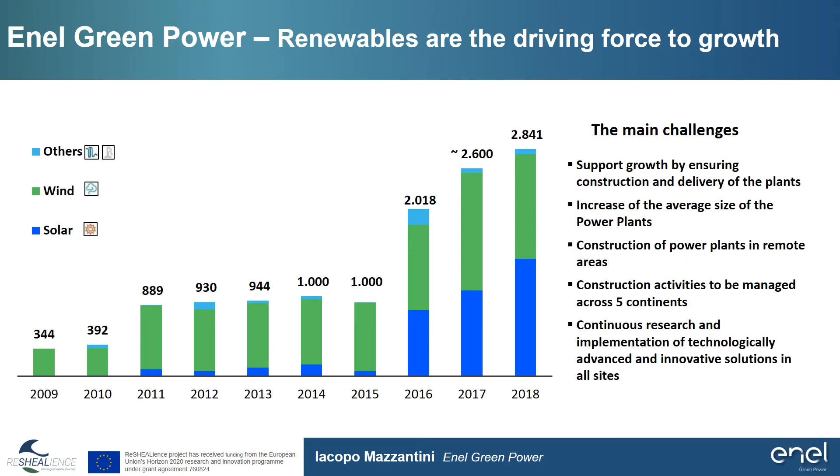The Enel Green Power strategy is based on 2 pillars. One of these is innovation and the other is sustainability. The strategy pillars are principally for shared value creation, in particular for the company, the environment, and local communities near the plants.

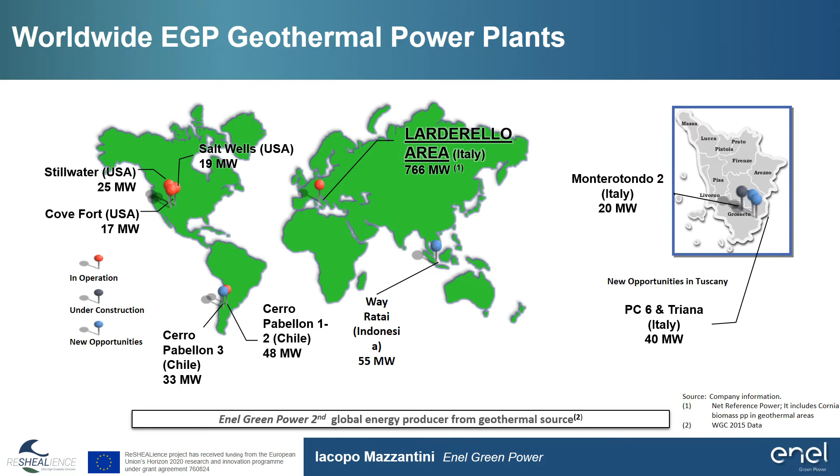We have geothermal power plants principally in Italy, in Tuscany, and other plants are in the US and in Chile. The capacity of geothermal power plants in Enel Green Power is 900 megawatts, and Enel Green Power is the second global energy producer from geothermal sources.

The assets. Here we have a few numbers related to geothermal power plants in Tuscany. They have been in operation since the last century. 37 generating units, 500 wells and 700 pipelines, more than 1,800 employees, 766 megawatts of net capacity, about 5.7 terawatt hours of annual production, and the average load factor is around 90%. 4 million tons of CO2 avoided.

The strong points are: the biggest fully integrated geothermal operator, pioneer in the use of geothermal resources. We have a culture of field cultivation, basically with reinjection as the main strategy to compensate the field decline. Performance leadership, efficiency and availability of power plants, and we are proprietary of a patented technology named AMIS. Geothermal power production in Italy covers about 1/3 of Tuscany's energy consumption.

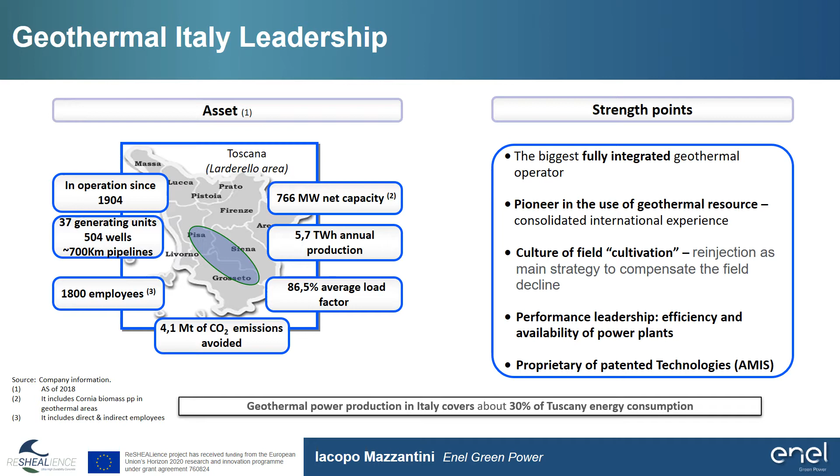Pilot objectives. Enel Green Power has built and will operate 2 pilots in Tuscany. The first pilot consists of a small-scale water tank for a cooling tower, about half size. The second pilot consists of a full-scale debris tank, a mud basin for drilling applications.

The main objectives are: demonstrate in an industrial site the behavior of ultra-high durability concrete in different configurations compared with conventional concrete. Measure corrosion in the conventional solution and compare it with ultra high durability concrete behavior. Verify experimentally the progression of cracking compared to what was estimated in the design phase. Continuous control of strain of the structure. Study the self-healing capacity of cracked elements and support communication and dissemination.

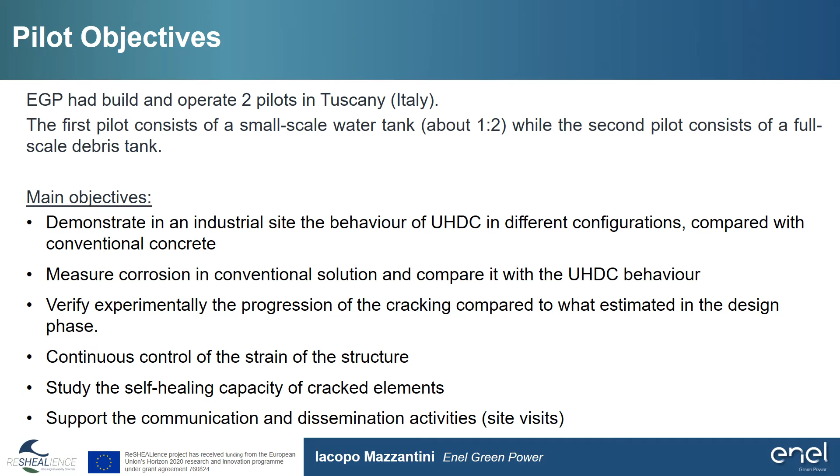The location of the pilots and the exposure conditions. The pilot is in the Chiusdino Power Plant near Siena, and the exposure condition is XA3, chemical attack in a highly aggressive environment. Pilot A, the basin for the debris tank, will be built near the drilling station and used during the execution of a new production well, reproducing the same operating conditions.

Basin B is the water tank, already built within the area of the power station in operation, and reproduces the most real operating conditions possible. The pilot tank will be connected to the real tank of the power plant in order to use the stream of geothermal water.

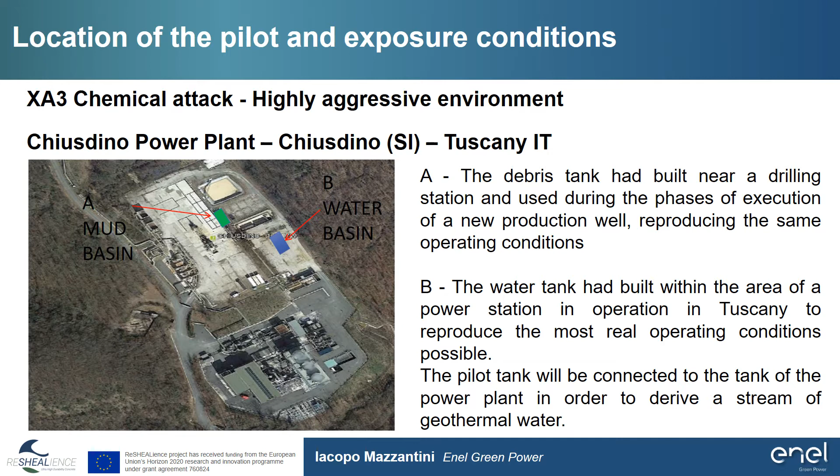Here we have the geometry, the final design of the water basin, and you can see it is divided into three small tanks. The color is related to different types of mix design, thickness, and geometry of the basin. In particular, from the left side, we start with traditional concrete, arriving on the right side with the slab in very small thickness: in one case 2 centimeters, and in the other case 3 centimeters of thickness. And the different color is the addition of nano cellulose and nano alumina.

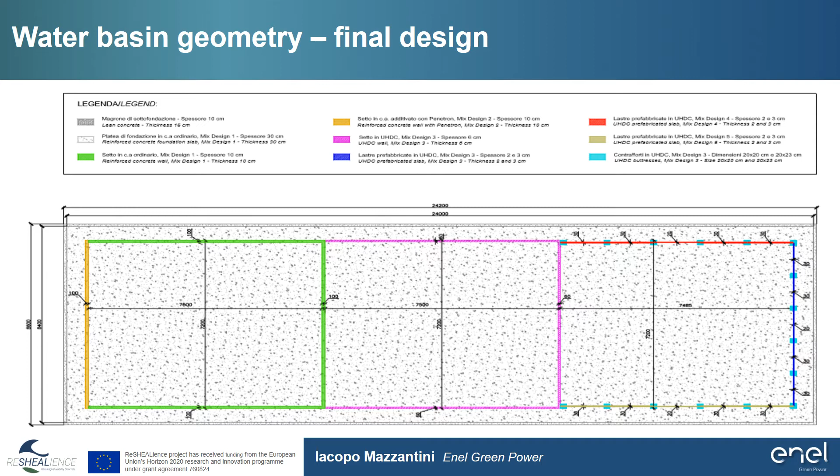Here you can see the mud basin geometry. The geometry is like the traditional mud basin, and we have used the same mix design for all walls, and we will use this basin when we start the drilling operation.

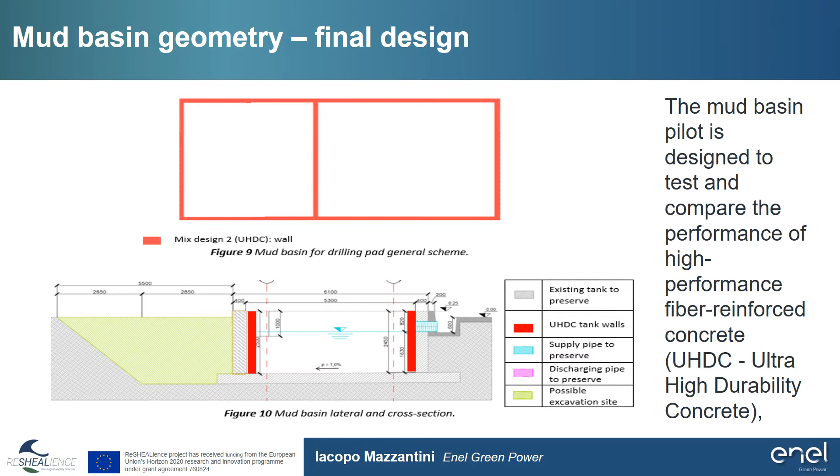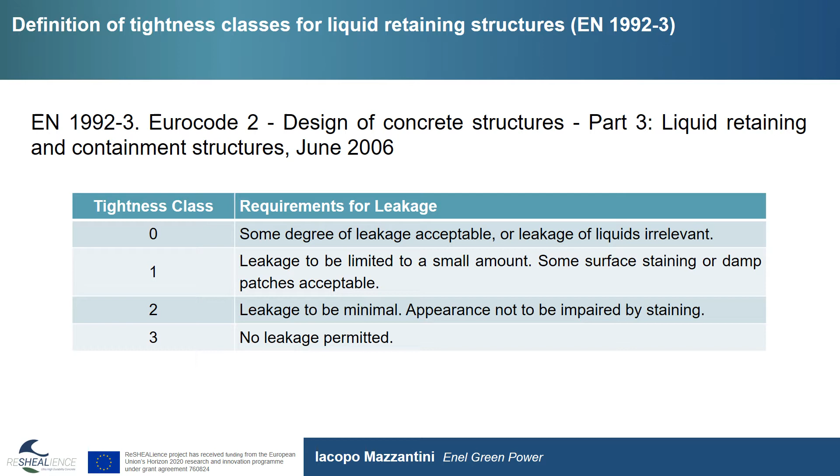In class 0, we can have leakage, and with a growing class we need to reduce the leakage, up to class 3, which requires ensuring the water is held without leakage.

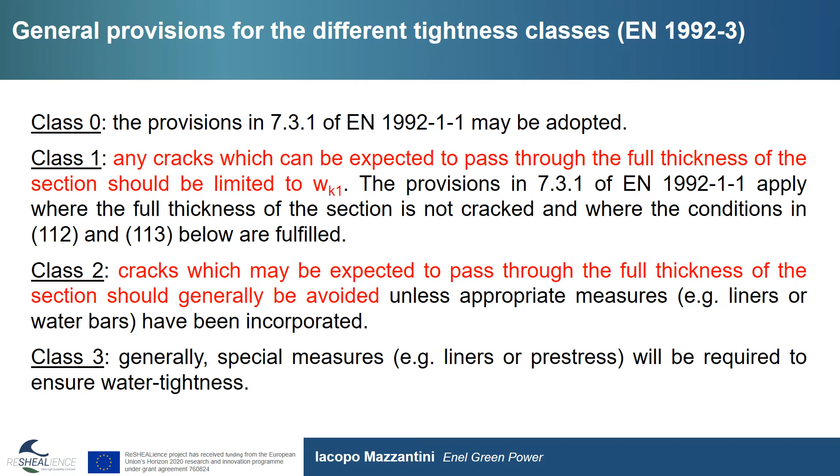The allowable crack width wk1 following EN 1992-3, and the diagram shows the maximum allowable crack width as a function of the ratio hD to h, which is related to the ratio between the acting bending moment and the first cracking moment in a cantilever wall. The moment is related to this formula.

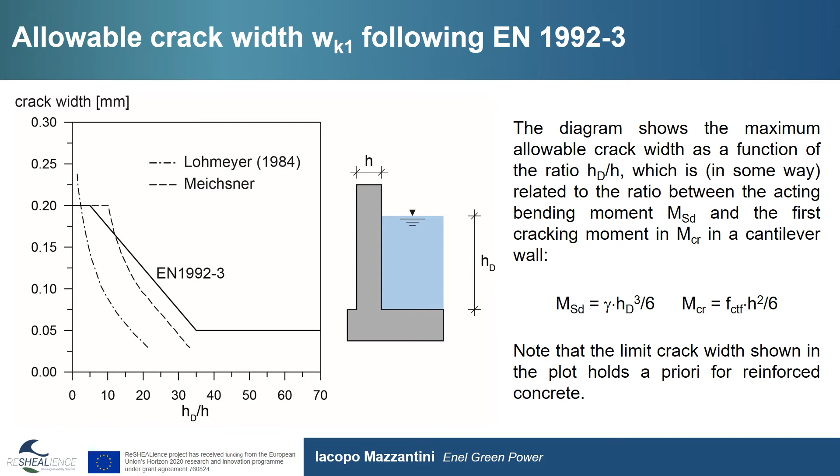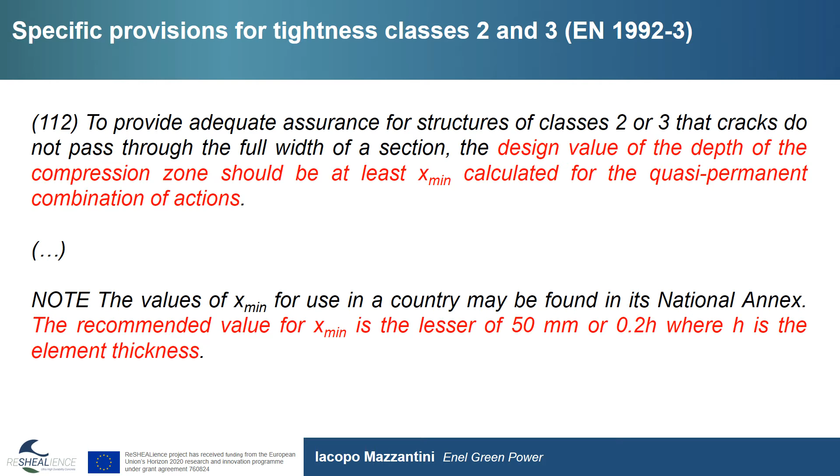for the quasi-permanent combination of actions. Specific provision - another explanation of specific provisions. If the provisions of 7.3.1 for thickness class 1 are met, then cracks through which water flows may be expected to heal in members which are not subjected to significant changes of loading or temperature during service.

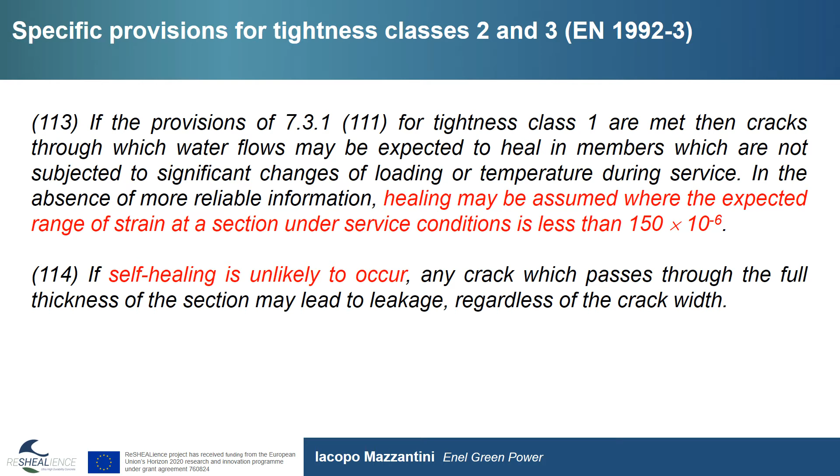In the absence of more reliable information, healing may be assumed where the expected range of strain at the section under service condition is less than 150 multiplied by 10 to the -6. If self-healing is unlikely to occur, any crack which passes through the full thickness of the section may lead to leakage, regardless of crack width.

Summing up, the structure at issue was designed in order for leakage to be minimal, as the focus of the pilot is on the tightness guaranteed by concrete alone, with no special measures. Class 2 was assumed in the design. In service condition, SLS, which is the most important design situation, calculations are focused on crack width and compression zone depth. The structure should also possess sufficient resources in order for failure at ULS to be averted.

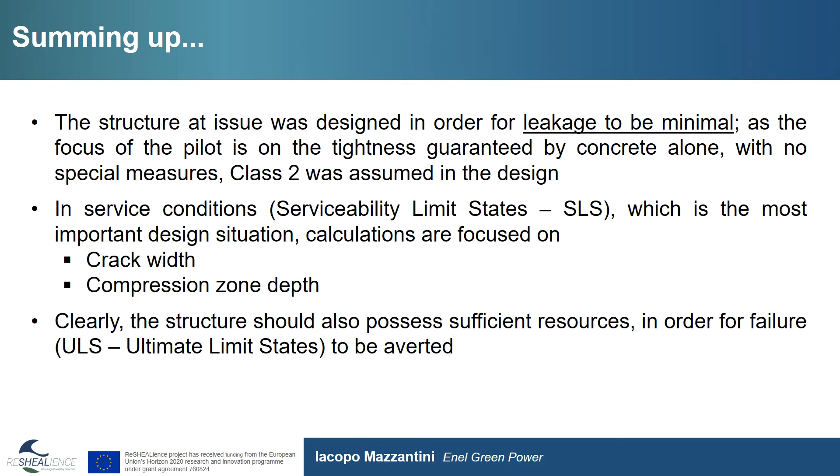Here we have the geometry of the water basin. Basin 1 is 7 by 7.5 meters, reinforced concrete with a thickness of 100 millimeters. The second basin is made with ultra high durability concrete with fibers, with a thickness of 60 millimeters, and in basin 3 we use

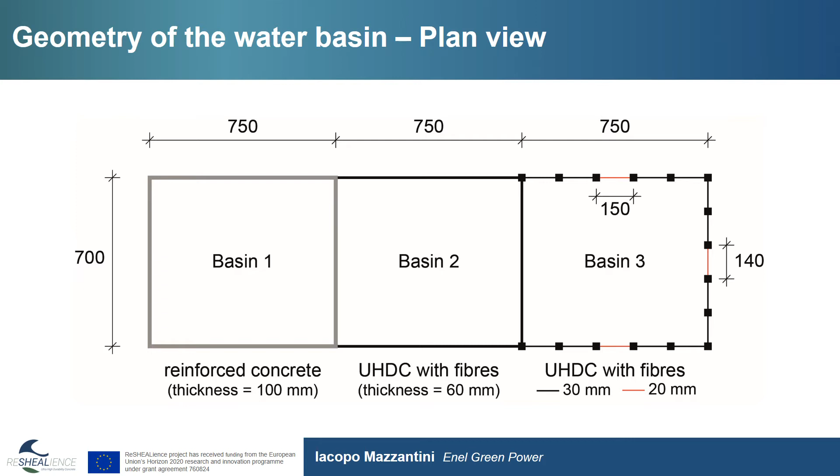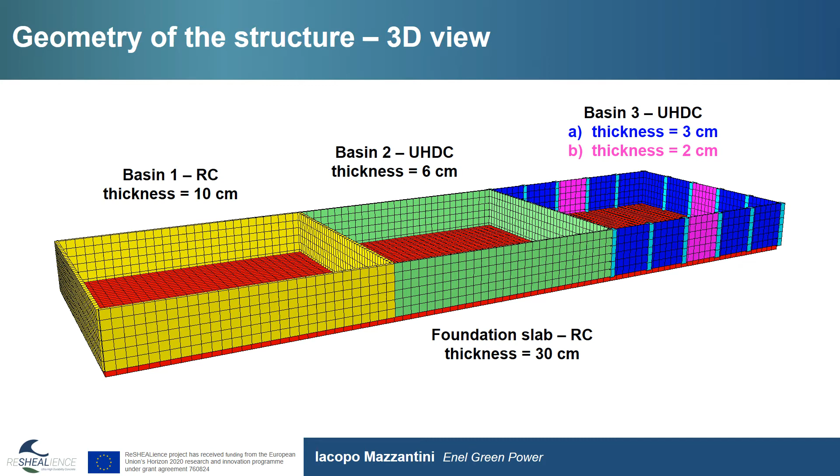The geometry of the structure in 3D view is here. The color is related to the thickness and the mix design, and we can see the difference from 10 centimeters up to 6 centimeters, and 3 and 2, for the walls of ultra high durability concrete. The foundation is traditional concrete with a thickness of 30 centimeters.

The materials are reinforced concrete C25/30, mechanical properties from EN 1992-1-1. Characteristic cylindrical compressive strength is 25 megapascal. Average direct tensile strength 2.6 megapascal, average indirect tensile strength in bending 3.1 megapascal, and instantaneous modulus of elasticity

31 gigapascal. Ultra high durability concrete is from an experimental campaign carried out at Politecnico di Milano on thin beams and deep beams, tested in 4-point bending to characterize the behavior.

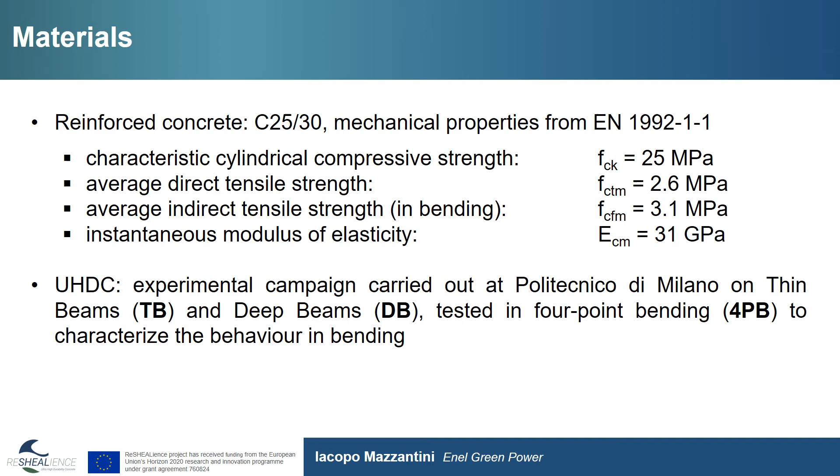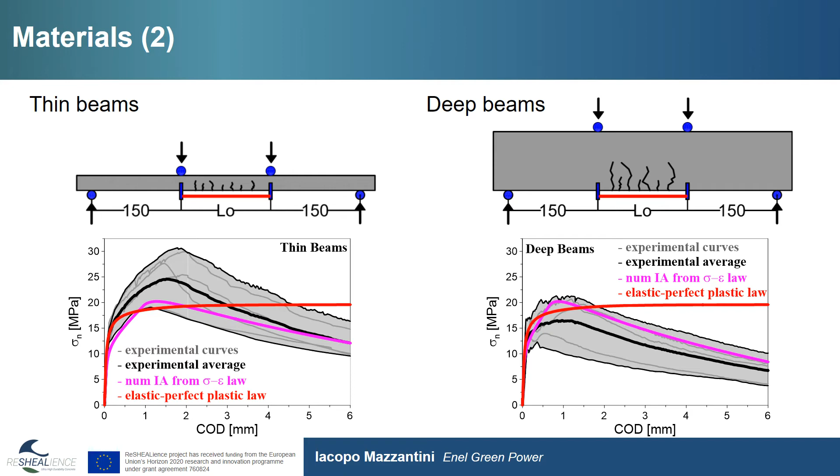The experimental campaign highlights strain hardening behavior both in thin beams as well as in deep beams, with good agreement with the elastic perfectly plastic approximation.

Based on the experimental results, the following properties were assumed in the design: average direct tensile strength of 5.6 megapascal, average indirect tensile strength 9.6 megapascal, and instantaneous modulus of elasticity 45 gigapascal.

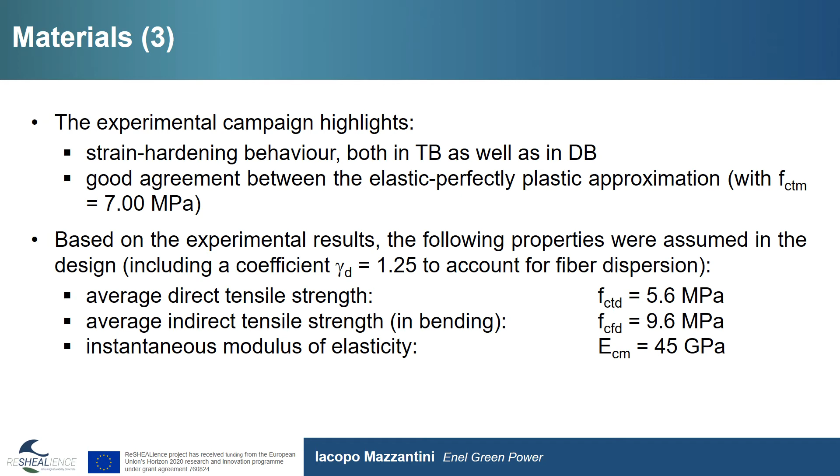Preliminary design of thickness for the 3 basins. The design of the wall was carried out with reference to the maximum water depth equal to 1.5 meters, using a simple design equation based on a cantilever structure scheme for basins 1 and 2, with A to infinite and the ratio between A and B going to infinite, and on a slab clamped along 3 edges for basin 3, thanks to the presence of the buttresses.

For basin 1, after the calculation, we have a result of 104 millimeters of thickness, and we use a thickness of 100. In basin 2, after the calculation we have 59 of thickness, and we use 60. In basin number 3, we have from the calculation 25 millimeters of thickness, and we choose to use 20 and 30 millimeters of thickness.

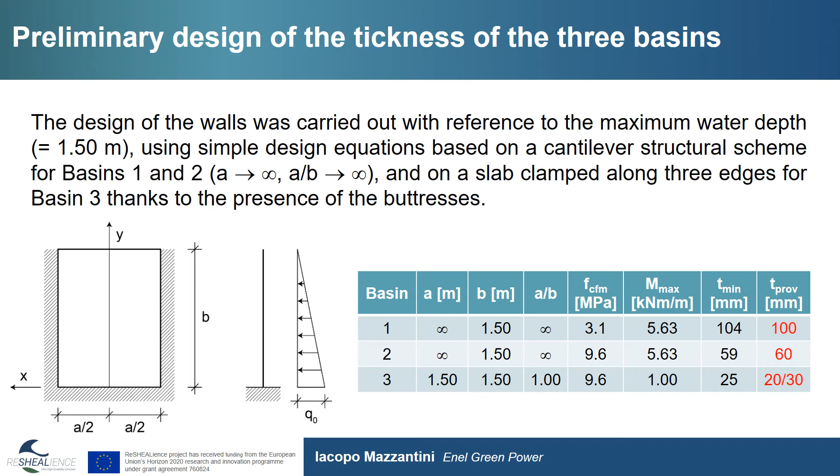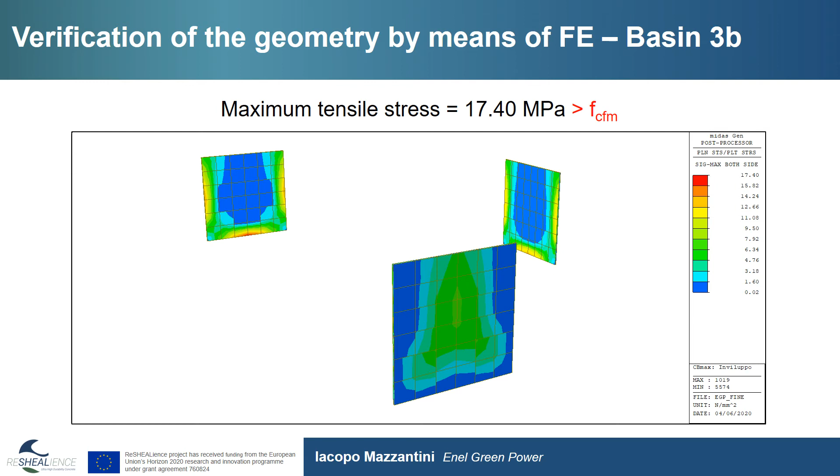And in 3B, applied on the wall of 2 centimeter thickness, we are arriving at 17.4 megapascal, which is more than the projectual value.

Definition of SLS and ULS of the structure. In service condition, the structure is checked under water level of 1.3 meter for crack width and depth of compression zone. The ultimate limit state is assumed to take place under uncontrolled increase of the water level above the service level.

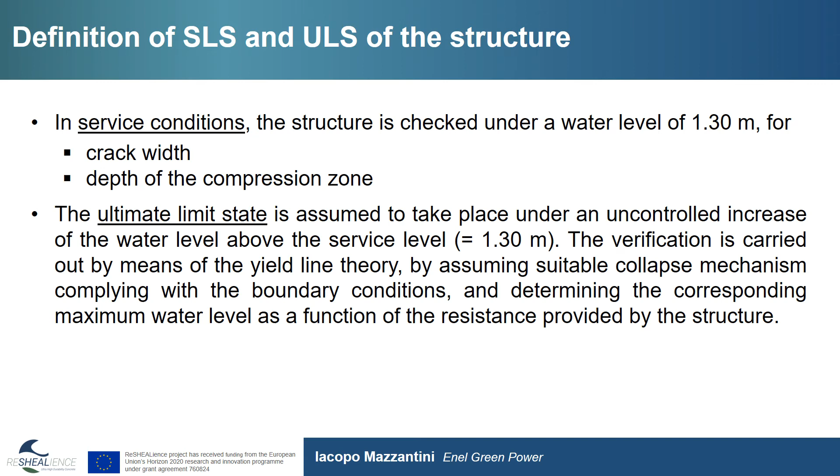The verification is carried out by means of the yield line theory by assuming the suitable collapse mechanism complying with the boundary condition and determining the corresponding maximum water level as a function of the resistance provided by the structure.

In service condition, part 1. The verification of the walls was carried out with reference to the same structural scheme used in the design phase. The stresses and deformations were calculated by assuming A is the measure of the wall length, a cracked state stress distribution for reinforced concrete as per EN 1992-1-1. B is the height of the water level, with an elastic perfectly plastic constitutive law for ultra high durability concrete.

In the table we can see A in the first and second basin. The measure of A is infinite. B is 1.3 meter, the height of the water level. The ratio is infinite for both basins.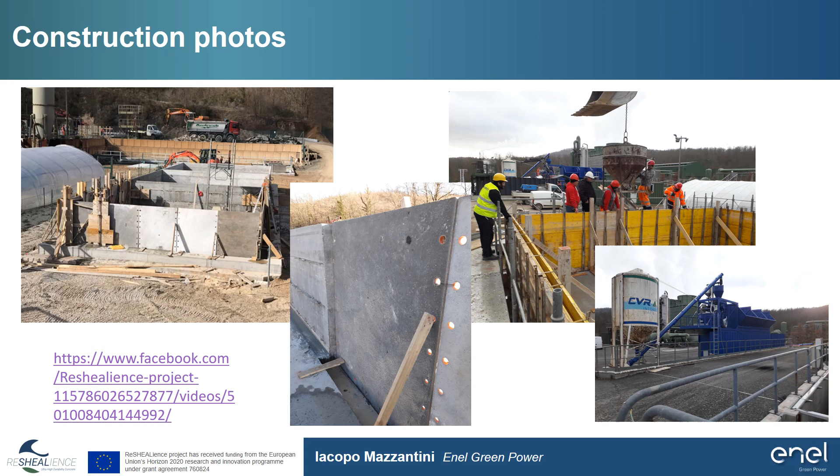In the next one, we can see the mud basin and the formwork in the yellow color. In the first, it's after removing the formwork, and in the second, during the construction of the formwork.

In the third we can see Liberato during the casting of the small thickness wall, and in the final one, removing the formwork and cleaning the basin.